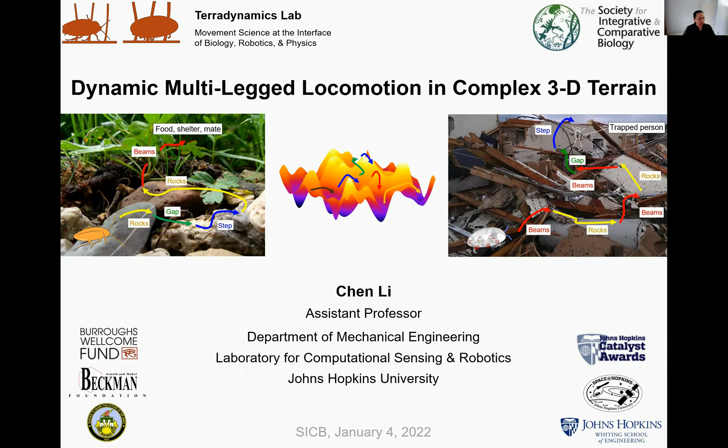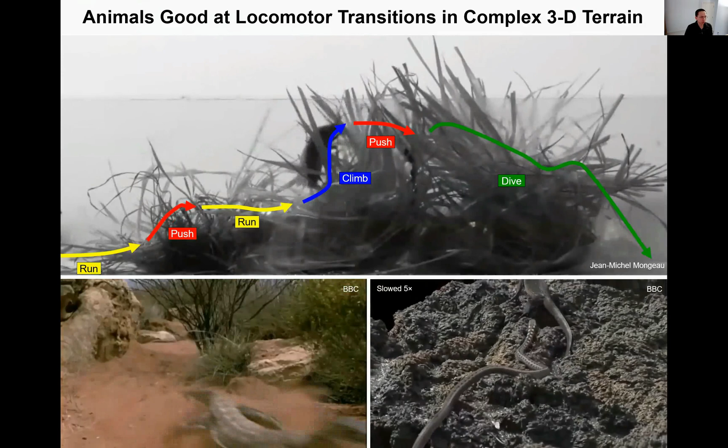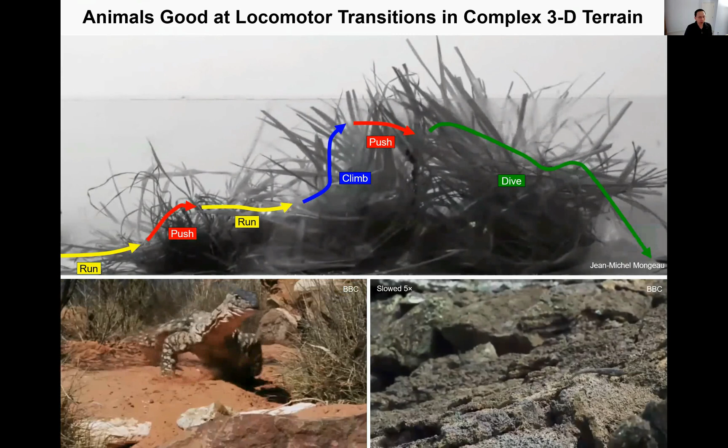Hopefully, my talk is going to provide a little bit of a different perspective on legged locomotion in more complex environments. Animals are very good at moving through all kinds of environments. As shown by just a few examples here, we have terrestrial animals that can dynamically transition through different locomotor modes using their legs, and even limbless animals, as you see, to traverse very large obstacles in complex 3D terrain.

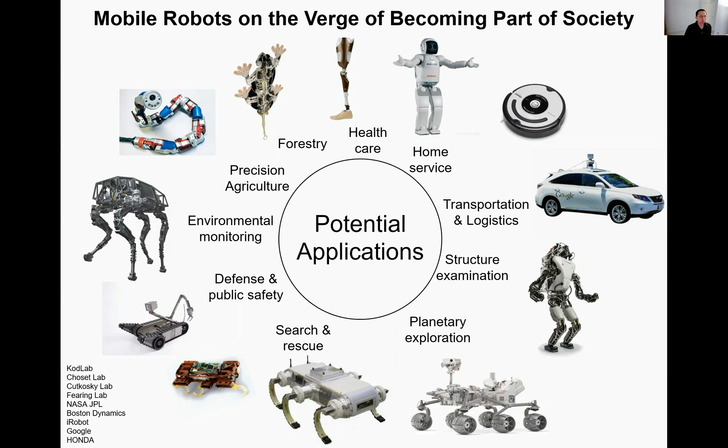And we have been envisioning having robots be able to do so as well for several decades now, to help us humans do many different things. You can see here some examples of recently developed terrestrial robots, some of which are already venturing into the real world. For example, robotic vacuums, Mars rovers, and also self-driving cars.

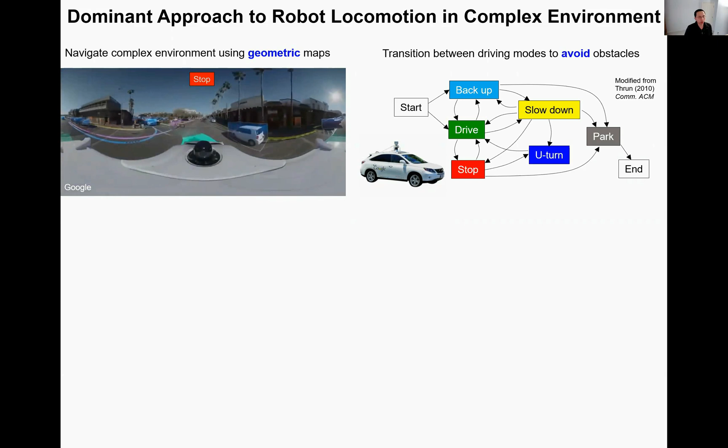The main approach of robots in terms of moving in complex environments is typically by creating a geometric map of its environment and then using it to plan a safe trajectory to avoid obstacles. So here, the self-driving car is classifying other vehicles and pedestrians and cyclists as obstacles and avoiding them by transitioning across different driving modes. The premise for this approach to work well is that you need to have locomotor-environment interaction that is well understood, so that you can control your vehicle or robot to readily follow the planned trajectory precisely.

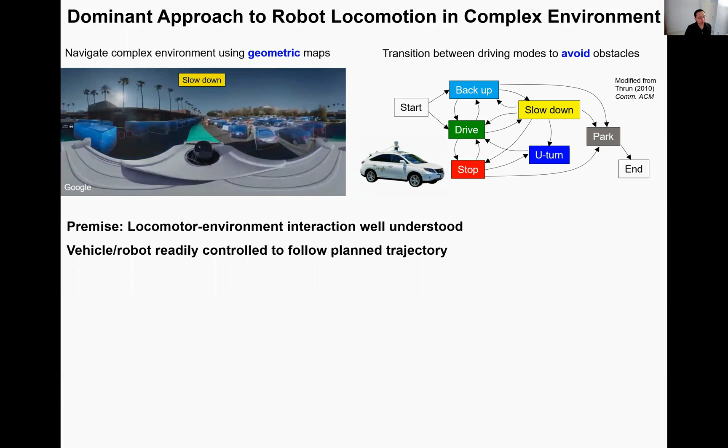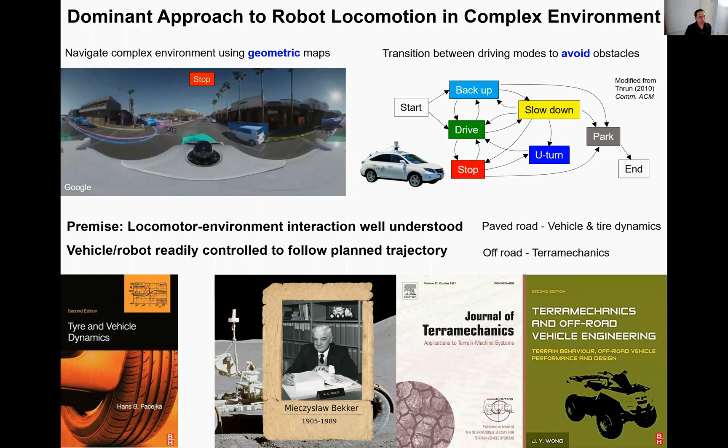And we are able to do this because we have vehicle and tire dynamics for paved road, as well as terramechanics for off-road vehicle mobility, which have been developed over the last several decades to 100 years. More broadly, we also have these kinds of models describing the locomotor-environment interaction for flight and swimming on a very broad scale, thanks to a couple hundred years of aerodynamics and hydrodynamics, entire fields of tools and models being created.

And they have not only allowed us to understand how animals move, but also how to create devices that do so in fluid environments. For terrestrial locomotion, we also have made significant progress over several decades. And so far, we have already achieved very high level understanding of near steady state single mode locomotion on relatively simple flat rigid ground. For example, the spring mass model for running, as we are all very well familiar with. And they have also allowed us to not only understand how animals move, but create robots that can do this really well.

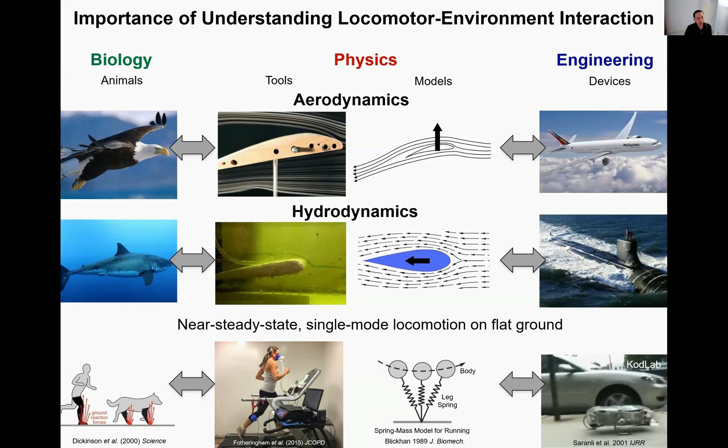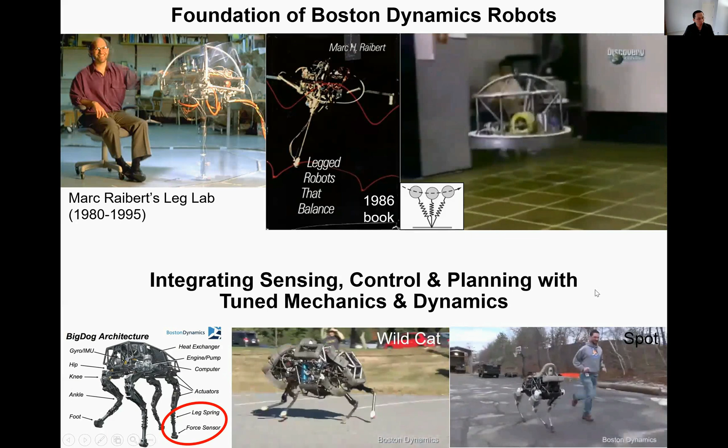It is in fact because we understand such fundamental mechanics and dynamics of multi-legged locomotion as well as we do that we have these wonderful legged robots from places like Boston Dynamics. Marc Raibert, the founder of Boston Dynamics, was in fact a professor early in his career, and he not only understood and appreciated the mechanics and dynamics of legged locomotion, but really focused on creating robots that integrate sensing, control, and planning with tuned mechanics and dynamics to achieve robust locomotion on relatively simple ground.

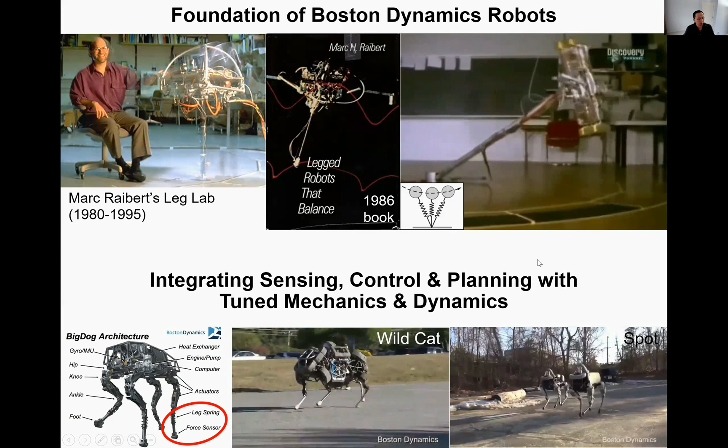But when we look a bit more broadly, beyond such simple flat surfaces, we can see that in the real world, there are actually more complex terrains such as desert sand or loose Martian soil, or even forest floor and earthquake rubble, where we have lots of heterogeneous large obstacles for which obviously these relatively simple locomotor-environment interaction models no longer work. And in fact, in many of these cases, we have had a long lack of tools and models to understand this interaction.

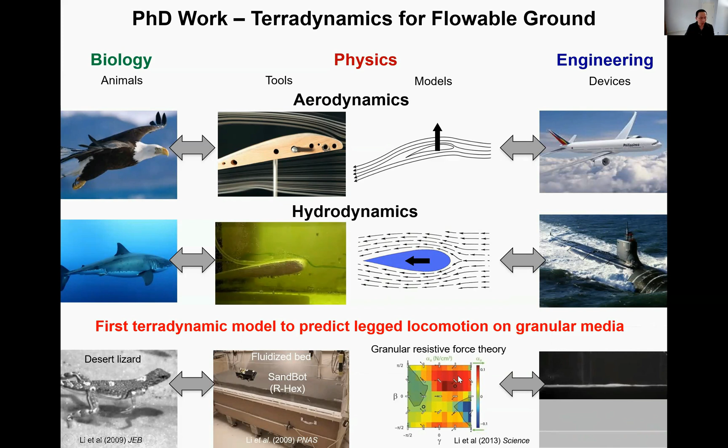So in other words, to begin to make progress, we should try to create this new field of terradynamics on the same level of aero and hydrodynamics to better understand such interaction. So I started working towards this when I was still a PhD student with Dan Goldman at Georgia Tech. I focused on legged locomotion on granular media by observing how animals and robots as physical models move on granular media. I created the first terradynamic model of legged locomotion, which is a granular resistive force theory, essentially experimentally mapping out the lift and drag forces of a plate element moving in granular media and integrating them to actually predict the forces and movement during legged locomotion.

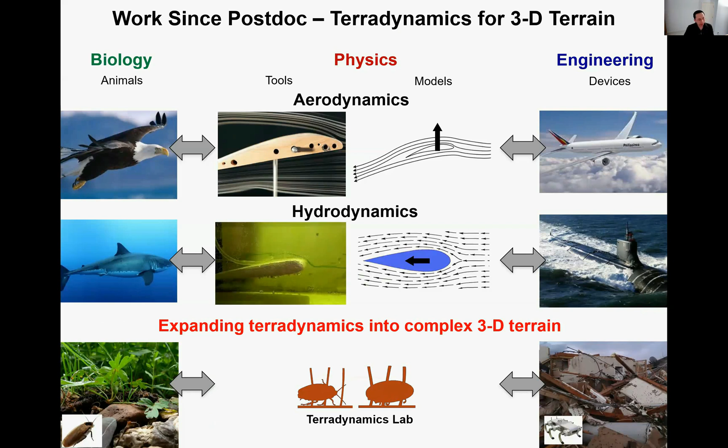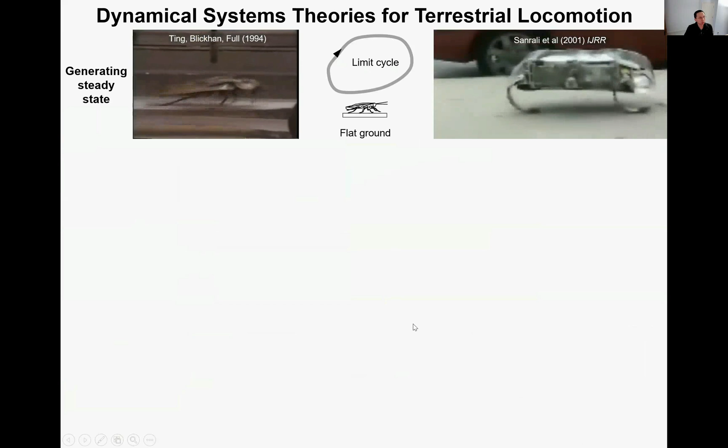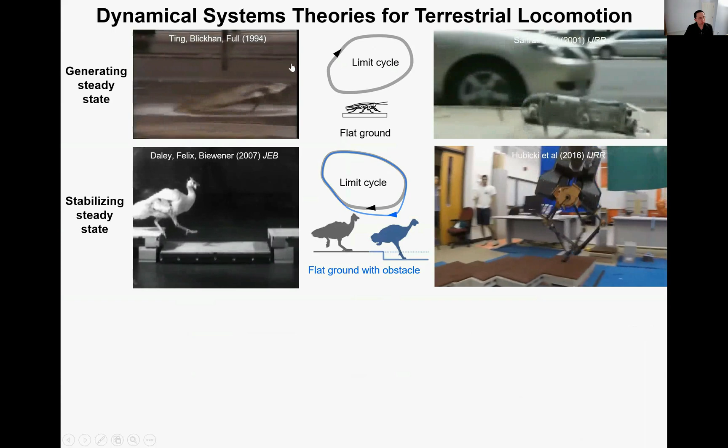After my PhD, I began thinking about how to expand terradynamics into more complex 3D terrain. And when we look back at what we know about legged locomotion in terms of high level advanced understanding using dynamical systems theories, we can see that the majority of our understanding so far has been largely focused on how to generate and how to stabilize single mode near steady state or limit cycle behavior, as we see here. But in these kinds of complex 3D terrain with many large obstacles, obviously animals and robots do not always stay near the limit cycle. They get very frequently and substantially perturbed away from the limit cycle.

And we have a relative lack of even conceptual ideas or frameworks to understand such locomotor transitions. So how do we begin? So when I first started thinking about this, I was a postdoc with Bob Full at Berkeley. And in Bob's lab, we have all kinds of little critters, such as cockroaches, which Bob's lab has studied for several decades.

And for me, someone with a little bit of experience studying locomotion in complex terrain, I decided to look at how cockroaches can go over these kinds of large obstacles, because this is very often found in their natural habitat. But you can see that a forest floor with these obstacles just seems formidable. How do you even get started? So I decided to focus on how they traverse dense vegetation, and I used grass-like beams, which are laser-cut paper assembled into arrays as a model system to enable repeatable systematic experiments.

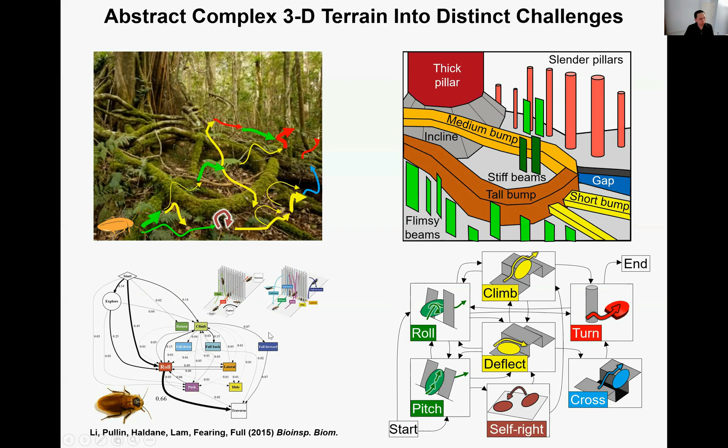So our hope is that if we can understand how the animals' locomotor modes and transitions when interacting with these different types of obstacles emerge from the locomotor interaction and how these transitions can be controlled, then perhaps we can piece all this together to better understand such multi-pathway locomotor transitions. We take this interdisciplinary integrative approach at the interface of biology, robotics, and physics.

We study animals as model organisms to reveal the capabilities and limits of locomotion. They also provide proof of concept and inspiration for creating bio-inspired robots. With robots, we then use them as physical models to enable precise systematic experiments, which allow us to test and even generate biological hypotheses.

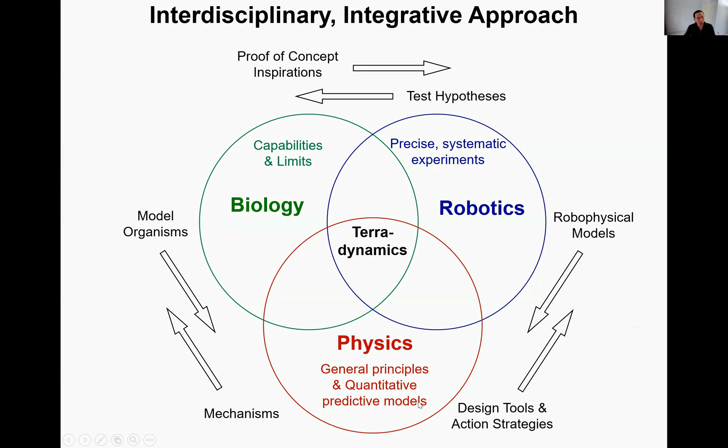We then create physics models, which allow us to discover general principles, as well as come up with quantitative predictions that can not only help reveal the mechanisms of success and failure in biological locomotion, but also provide design tools and action strategies for improving the performance of robots. Towards this, we have been creating a diversity of tools to enable better measurements of locomotion in complex 3D terrain.

For example, here we have this more refined version of grass-like beams in which we focus the bending at the membrane at the base, so that this is much easier to model. We can also control the thickness of the membranes to change the stiffness of these beams, and we can do this for other kinds of obstacles as well.

We also develop techniques to integrate many camera recordings to be able to automatically reconstruct the 3D kinematics of the locomotors, as well as the terrain obstacles if they move. And this is in fact not trivial because of the large rotations as well as the frequent occlusions. And finally, we also create this terrain treadmill, with which we can keep the animal on top to record for a very long time and over large distances of traversal.

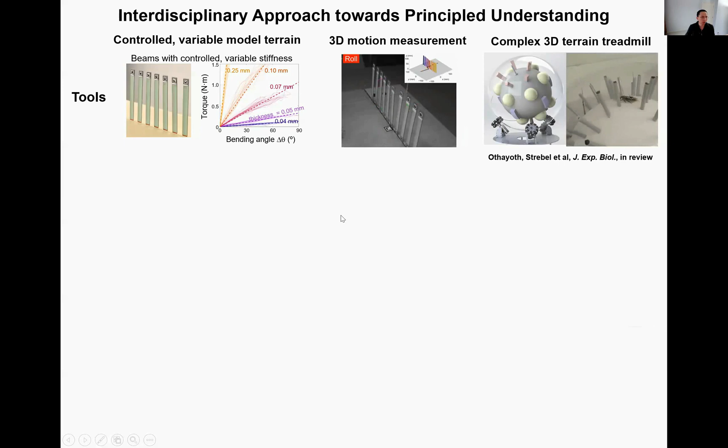Using this diversity of tools, we then study both animals, in this case legged cockroaches, as well as legged robots as physical models, overcoming this diversity of large obstacles of different types, as well as self-righting. And finally, we can then create a suite of physics models ranging from very simple ones to more complex ones to help reveal the mechanisms and discover general principles.

So I won't go into detail of all of these. Mainly, I want to highlight one particular scenario, of traversing these beam-like obstacles and using a potential energy landscape approach in one project, so that you get an idea of how we use this interdisciplinary integrative approach to make progress.

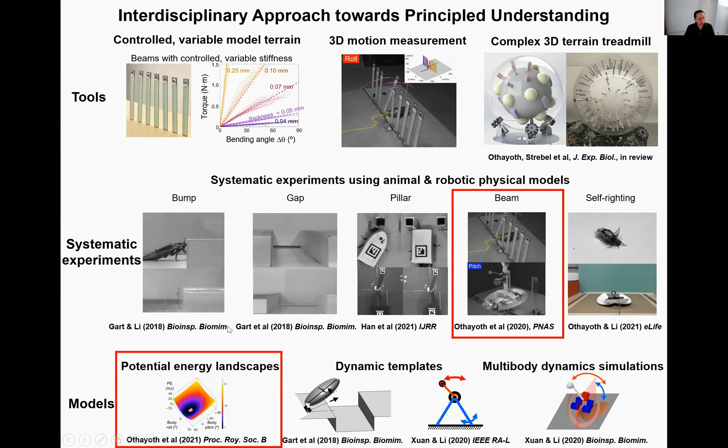And we were heavily inspired by early successes in the field of animal locomotion, where people focus first on studying and understanding the passive mechanics and dynamics, very often using feed-forward robotic physical models as seen here, as well as studying animals in the more feed-forward regime. Once you have this as a basis, you can then better understand sensory feedback processes.

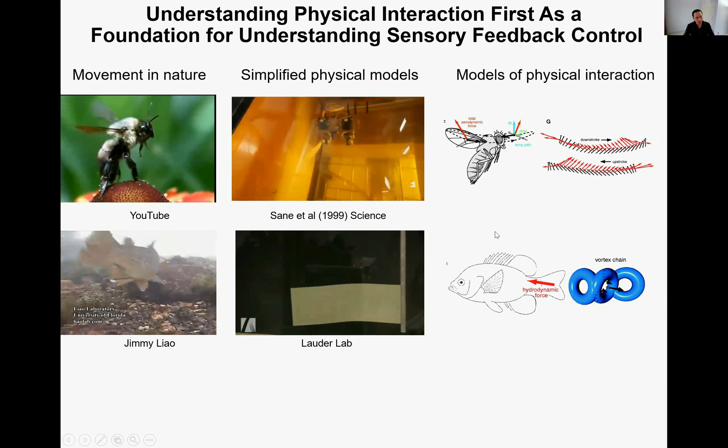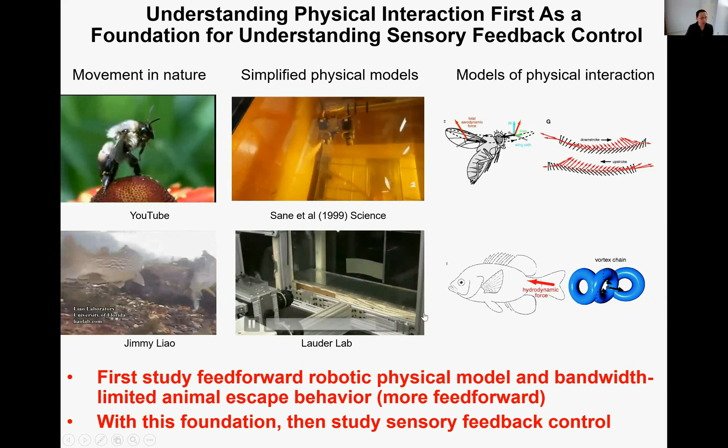So we study feed-forward robotic physical models as well as animals during escape or emergency self-righting behavior, in which their movement is more feed-forward. With this as a foundation, we then can further study the sensory feedback control. So in this project that I want to highlight, we're looking at this transition from what we call a pitch to a roll mode.

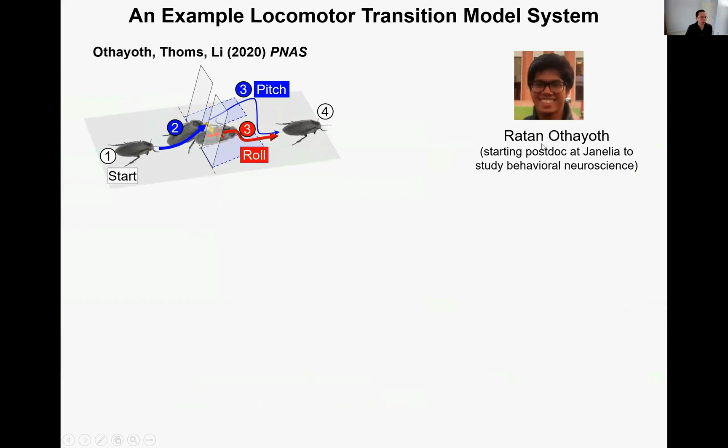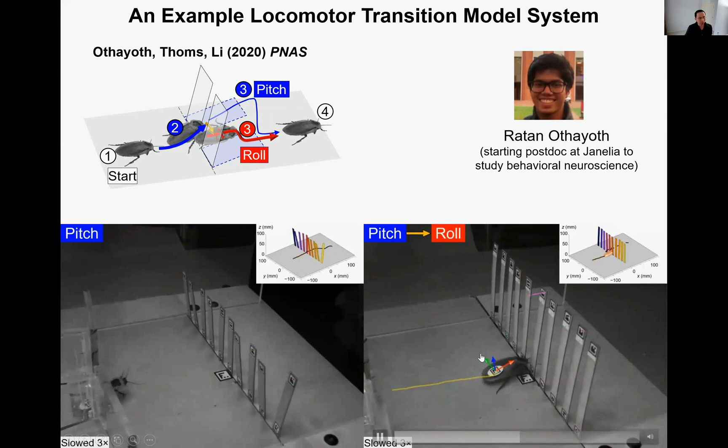This is led by my most senior PhD student, Ratan, who is going to start a postdoc pretty soon. So what we're looking at here is these cockroaches transitioning from what we call pitch mode, which is really just pushing down the beams, in which its body has to pitch up slightly due to the restoring torques, into this other mode, which we call roll. You can see the animal here. Before it's able to push across, it very quickly rolls its body into the gap to traverse.

So how do we understand how this locomotor mode transition emerges from the physical interaction and how it can be controlled? To model the physical interaction, we consider the simplest physics model that we can think of. We're completely ignoring the dynamics of the system, and we also approximate the animal as just a simple ellipsoid, which can translate and rotate. So you can then write down the total potential energy of the system, which is the sum of its gravitational energy, the body and the beams, as well as the elastic energy of the beams.

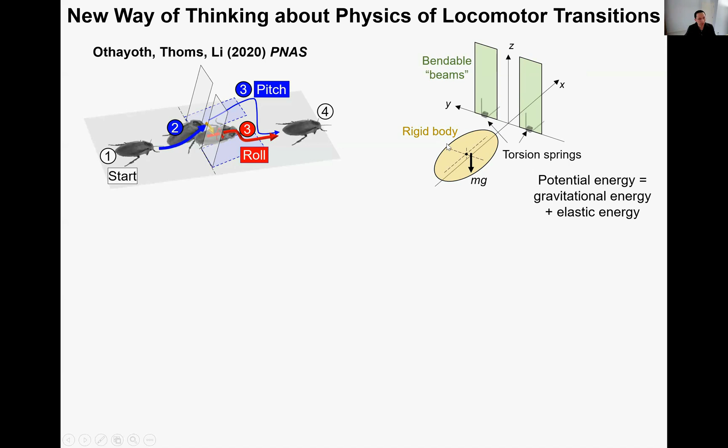So what this suggests is that the animal transitioning from the pitch to the roll mode is perhaps a transition of the system from being attracted to this pitch basin to then overcome this potential energy barrier in between to reach the roll basin. So is it true that this locomotor transition can be viewed as a destabilizing barrier crossing transition? Destabilizing here means that you are destabilizing yourself from this strong attraction into a basin.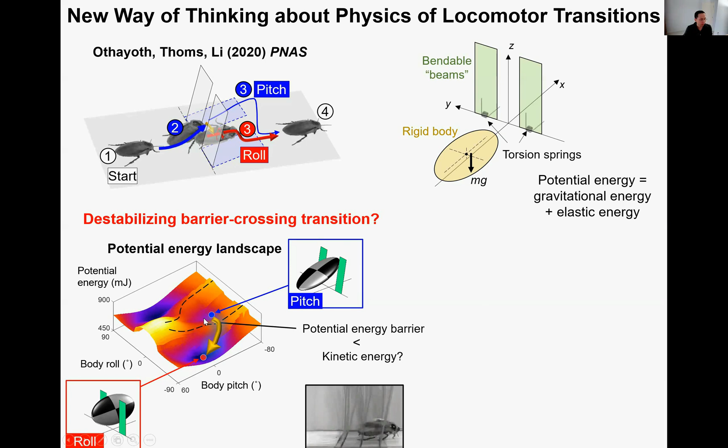Further, from my earlier study, you can see that these animals are oscillating their body quite frequently during this interaction because of their intermittent leg propulsion against the ground. So we further hypothesize that if you have sufficient kinetic energy that is greater than your potential energy barrier, it is perhaps enough to help you overcome this potential energy barrier to make this transition. And to test this, what Ratan did along with a master student is to build a robotic physical model, which is completely feed-forward. And you can see it is a physical realization of our very simple model. We have a gimbal mechanism with which it can freely pitch and roll. We can then drive it forward and apply oscillation that can be varied to change the level of kinetic energy.

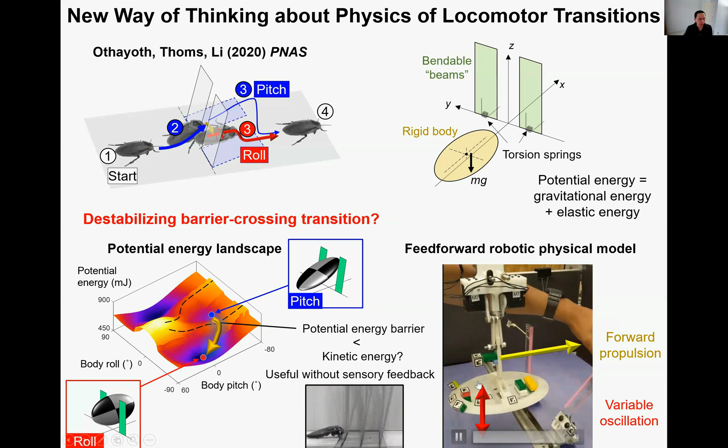Yeah, so here are our representative trials. You can see that without any body oscillation, the system is stuck in this pitch mode, being right in the middle of the two beams, pushing them down to traverse. Whereas when you have sufficient body oscillation with kinetic energy, you can then very quickly make the transition into this roll mode to traverse. And when we visualize our trials, which are shown here, the dots are the current state and the curves are the trajectory. You can see that for all of these pitch mode trials, the system is indeed strongly attracted to this pitch basin, whereas when it has sufficient kinetic energy, it is able to escape from that basin, overcoming a barrier and reaching this roll basin.

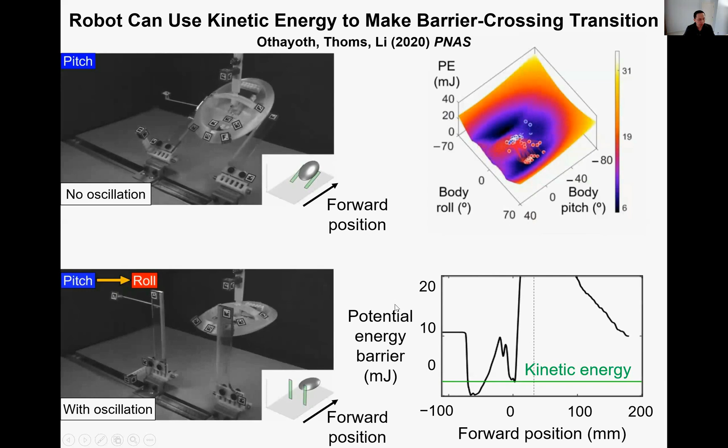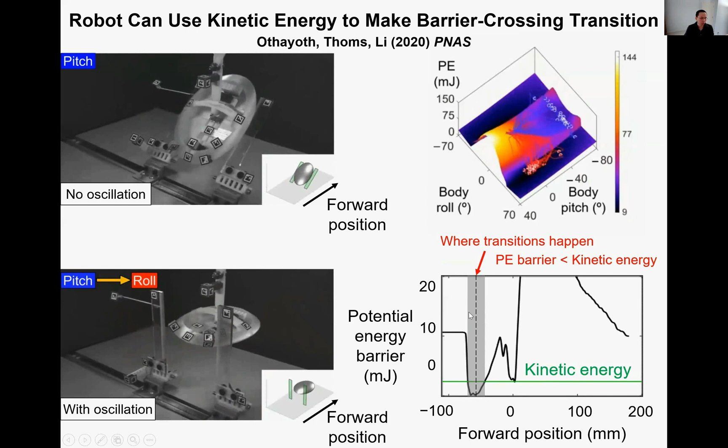And when we quantitatively measure the potential energy barrier as well as the kinetic energy, we found that as you go forward, the potential energy barrier is going to decrease to actually below the kinetic energy over here at this position. And when we measure the location, this mean and standard deviation of where this transition actually happens, it is exactly when the potential energy barrier is lower than the kinetic energy. And this confirmed our hypotheses. And this is not surprising because here we have a feed-forward robotic physical model whose body dynamics, whose transitions are entirely governed by this physical interaction. Further, we can also vary the stiffness of these beams to study how the transition dynamics change when the environment changes.

So you can see here when the beams are flimsy on the left here with low stiffness, the system does not make a transition. It just uses this push mode, and that's intuitive because when the beams are very flimsy, it's as if nothing is there. You can just move forward.

However, for these high stiffness cases, you can see that when the beams become stiffer and stiffer, the system has a higher and higher probability of transitioning from the pitch to the roll mode. And we can understand this using a concept of favorability, terradynamic favorability. What we think is happening is if you look at how deep these basins are, for example, here, we can see that in this case, with a high stiffness, you pause here, you can see that the pitch basin is actually quite a bit higher than the roll basin.

So what this means is that if you're stuck in the pitch mode, when you keep going forward throughout your traversal, your total potential energy of the system, even though it's stuck in that minima or near that minima, is actually going to continue to go up and up. So that's very energetically costly. Whereas if you are able to escape from that basin, overcoming just a small barrier to reach this lower basin, you are actually not going to have a potential energy that keeps going up like this.

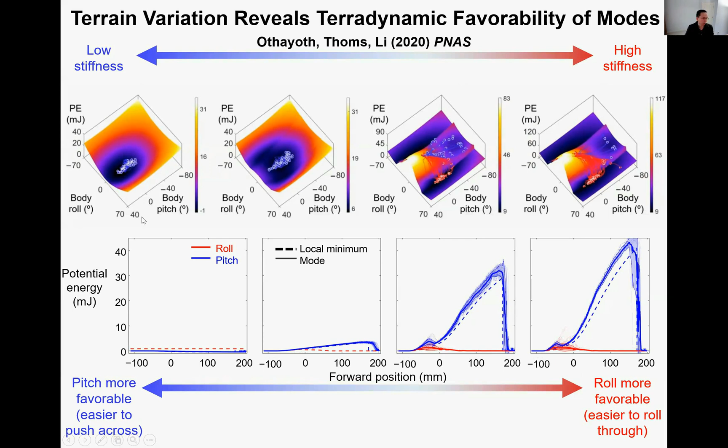A question you might already be wondering about is how can we go from this potential energy landscape model, which completely ignores dynamics, to actually predict the dynamics of locomotor transitions. This is something we're still working on, but here's a proof of concept led by my PhD student, Qihan. We can write down the equation of motion of the system by applying Newton's second law. On the left here, we have the inertial force, mass times acceleration.

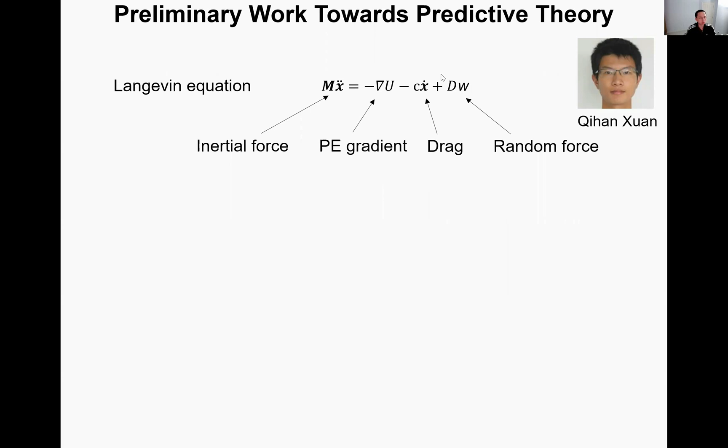And on the right here, we have all the external forces, including the potential energy landscape gradient, which describes conservative forces, including gravity and elastic force, as well as self-propulsion, because that's going to drive the system forward, which changes the potential energy landscape. And on the right here, we also have these dissipative force terms, as well as random force. Here we just assume a viscous drag as a proof of concept. Obviously, we still need to perform experiments to better characterize and model these other forces.

But with this very simple toy model, we can see that we can actually generate a dynamic simulation here, which is very similar to what we see in experiment. When we have a large level of random force, it is going to help the system, from being attracted to this pitch basin, to actually overcome a barrier to find the roll basin. Whereas if you have very little random force, you're stuck in that basin.

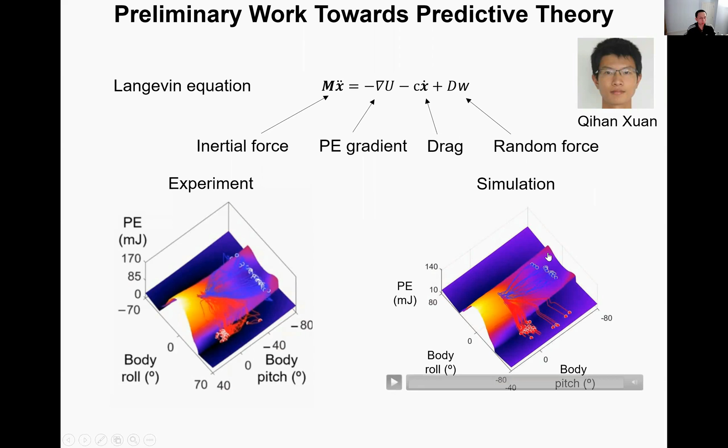Finally, Ratan also studied how animals make this transition, basically repeating the kinds of experiments and analyses, obviously scaled down for the animal in terms of the obstacle, and found that everything is consistent except one thing, that is when the transition happens for the animal, it is in fact where the potential energy barrier has come down and become comparable, but still quite a bit higher than the kinetic energy.

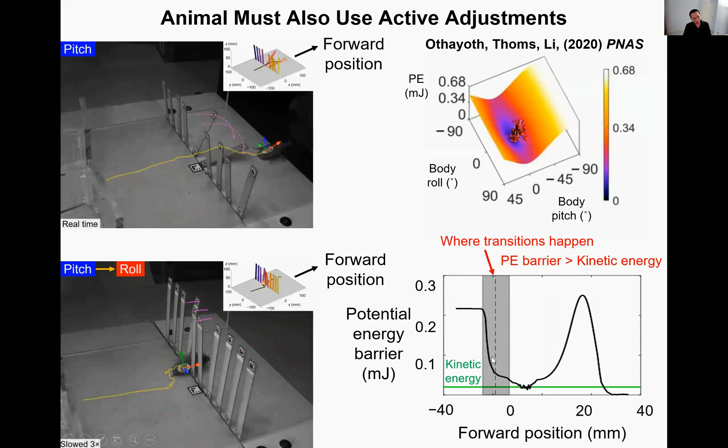And this suggests that there has to be something active going on, that the animal is very likely using sensory feedback control to change its own actuation to perhaps inject more directed mechanical energy, or even perhaps to bring down the potential energy barrier to facilitate this transition, which our very simple model doesn't capture. So towards understanding this, my other PhD student, Yaqing, recently performed this follow-up study where he quantified in great detail the body and the leg kinematics.

And he found that the animal is tucking its legs in right before this transition, most likely to reduce roll stability. It seems to be extending one hind leg while retracting another, which is most likely to generate a roll torque. We don't know yet because we don't have force measurements. But very interestingly, the animal also flexes its head up and down very frequently before this transition. And after the transition, when it's rolled within the gap, it also flexes the abdomen along with the head.

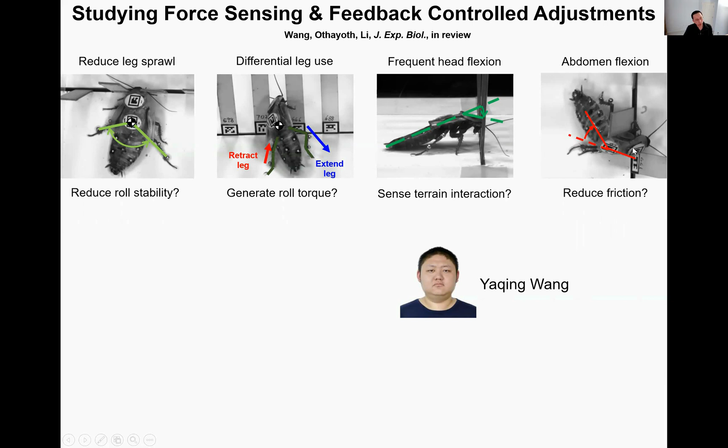And we think that these are likely to use the mechanical receptors within the body to sense this physical interaction with the environment and also to break the interlocking or frictional contact. So to understand the principles of such sensory feedback control, Yaqing has recently developed a refined robot in which he has actuators to flex the head and the abdomen, as well as actuators to control the body pitch, roll, as well as translation in an underactuated manner. And he also instrumented it with several force sensors, allowing him to measure the contact force against the environment.

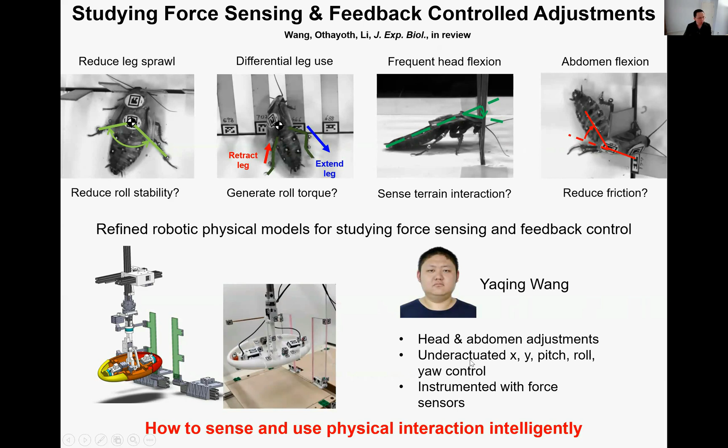And we're hoping to use this as a system to systematically discover how to sense and use physical interaction intelligently. As a proof of concept, here is a recent study led by my PhD student, Qihan, where he had this very simple rigid body robot, or animal, if you will, that can detect the contact forces and use that to infer how stiff the beams are.

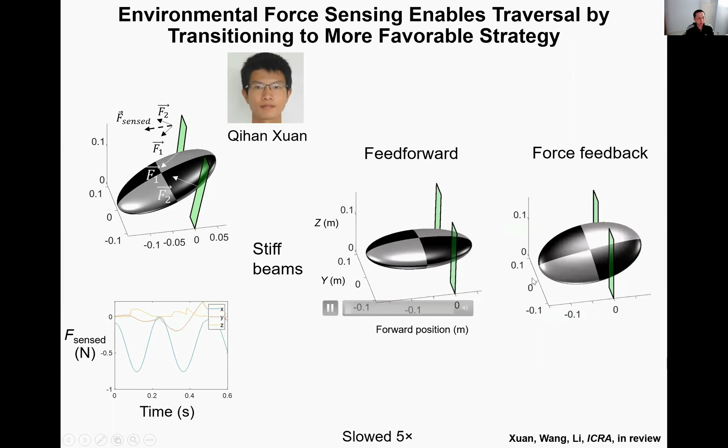So in this case, it initially does not let the robot have any sensory feedback. It has a limited ability to generate forward propulsion. So you can see that against stiff beams, it's not able to push forward. However, once he enables this environmental force sensing, he can then use it to switch from a pitch to a roll mode to traverse.

So I have highlighted our studies of beam traversal as an example to show how we can use this interdisciplinary integrative approach to make progress. And we have done this for several other scenarios, as I have already mentioned in the beginning, and we found that there are surprisingly general principles. First, the locomotion or locomotor transitions in each of these is quite stochastic, but actually also very stereotyped. For each one of them, we discovered there are actually only about 2 to 3 dominant modes and transitions.

And this is because when you apply this potential energy landscape approach, we found that for each of these, the interaction results in only maybe 2 or 3 very deep landscape basins to which the system is strongly attracted. So that emerges as the modes, and the transitions emerge when the system is able to cross these barriers to hop between modes.

And further, empirically in our experiments, we discovered many control and planning strategies which can actually help increase the performance of traversal or self-righting. And when we look back using this potential energy landscape approach or framework, we found that this can be understood as 3 different categories of strategies. First, you can do something active to steer yourself on the landscape.

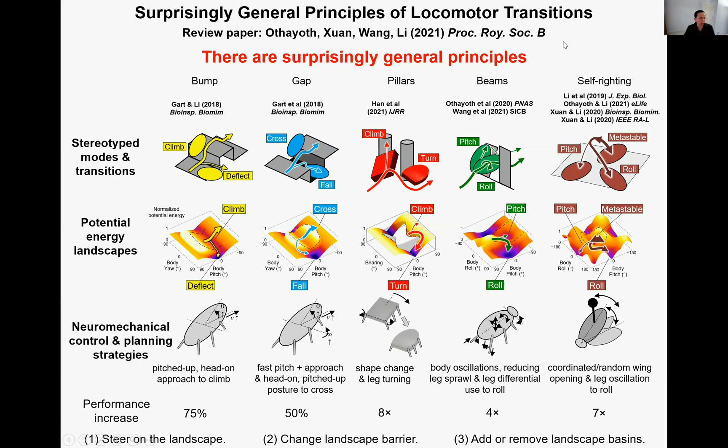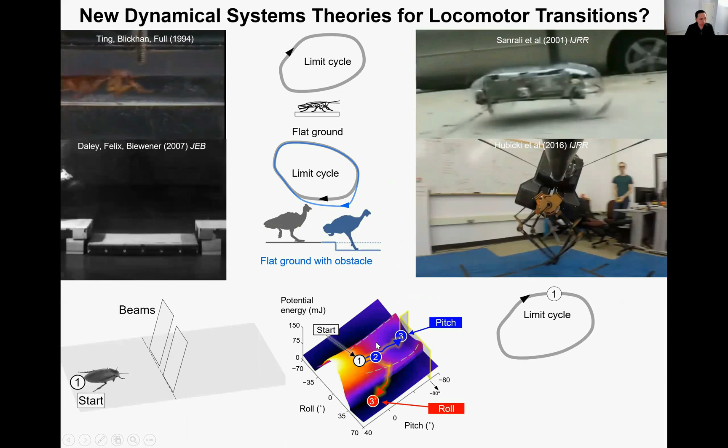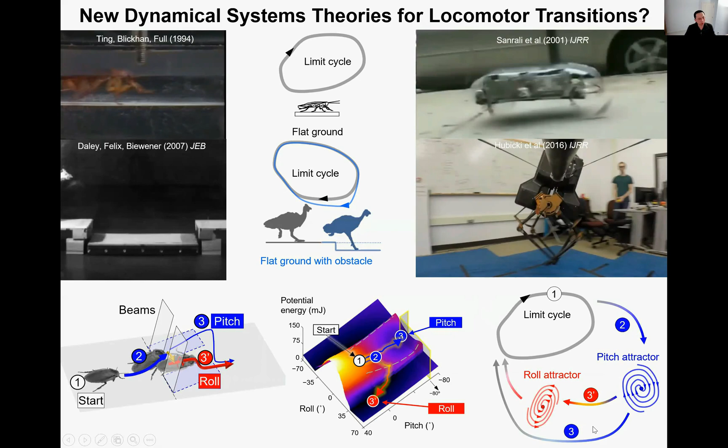So what all of this we think is pointing us to is that there are perhaps new dynamical systems theories waiting to be discovered for locomotor transitions. Beyond such limit cycle behavior, which can capture running or walking on flat ground, there might be other more transient attractors that are yet to be discovered, which can describe such strong attraction into such deep potential energy landscape basins. And if we are able to create such models, this is going to give us a more complete dynamical systems theory framework to allow us to understand not only steady or near steady state single mode locomotion, but actually locomotor transitions across modes.

So our longer term goal is that with these fundamental environmental interaction models, we can further discover how to intelligently sense, control, plan, and learn how to act upon these physical interactions to be able to actually traverse a large diversity of obstacles. And this will complement the existing approaches of using geometric maps to avoid obstacles.

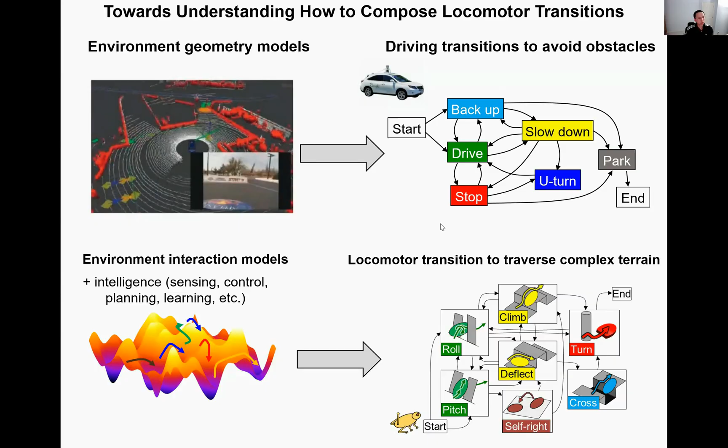And the ultimate dream is that once we have such fundamental physics or terradynamics of interaction with a diversity of complex terrain beyond the ones that I have briefly reviewed here, we are going to really have not only the ability to understand how animals move across the really complex real world, but also to truly enable robots to make an impact on many different parts of our society.